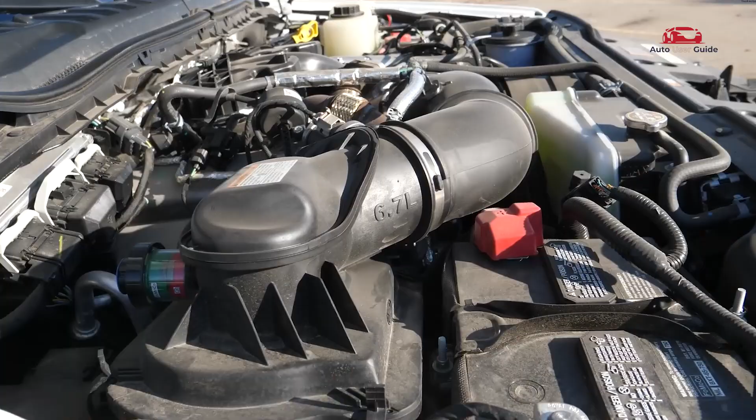Curious about the fuse box location and diagram for the Ford F-350, 2017 to 2019? Wondering where each fuse panel is and what its functions are? This guide answers all your questions, helping you easily locate and understand every fuse.

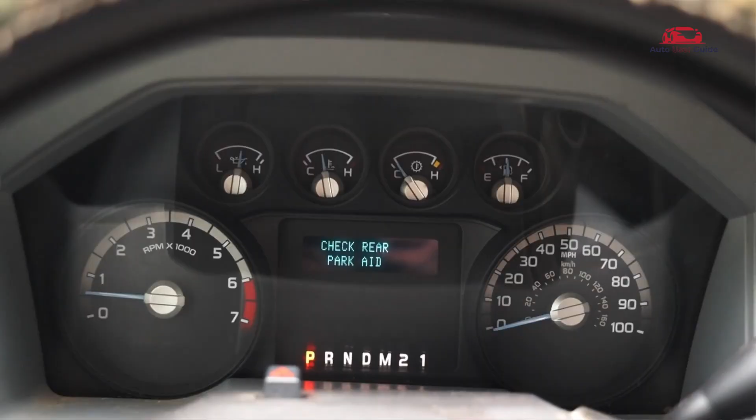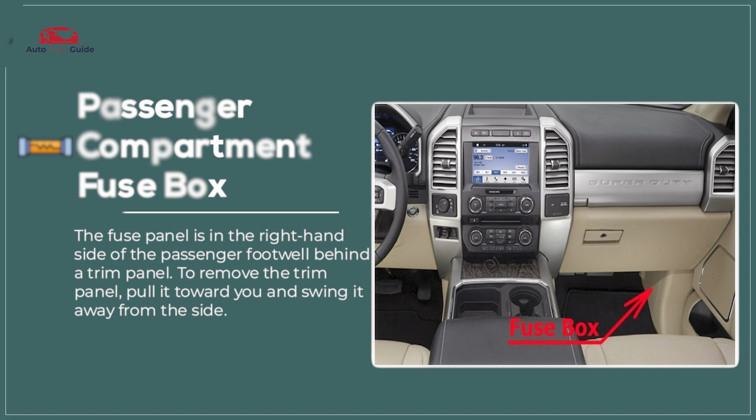Passenger compartment fuse box. The passenger compartment fuse box in the Ford F-350, 2017 to 2019, houses fuses and relays that protect essential interior electrical systems. It manages components like the power windows, audio system, interior lights, and climate controls. Each fuse is labeled for easy identification and service. It plays a key role in vehicle safety and electrical reliability.

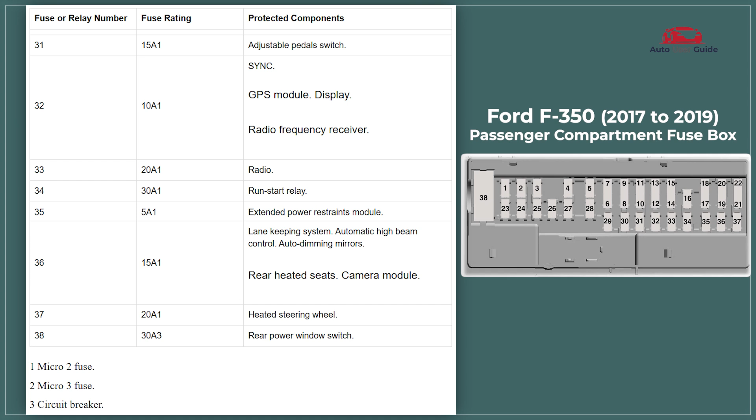Engine compartment fuse box. The engine compartment fuse box in the 2017 Ford F-350 contains high-current fuses and relays that protect vital engine and powertrain systems. It supports components such as the fuel pump, cooling fans, trailer tow module, and electronic power assist steering. This fuse box ensures proper distribution and safeguarding of electrical power under demanding conditions.

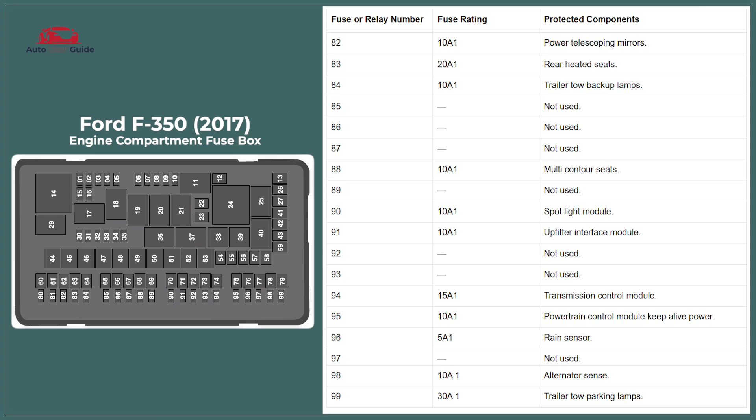The engine compartment fuse box in the 2018 and 2019 Ford F-350 provides protection and power distribution for critical engine and drivetrain components. It controls systems such as the ignition, fuel pump, cooling fans, and trailer tow circuits. Designed for durability, it handles high current loads essential for vehicle performance and safety.

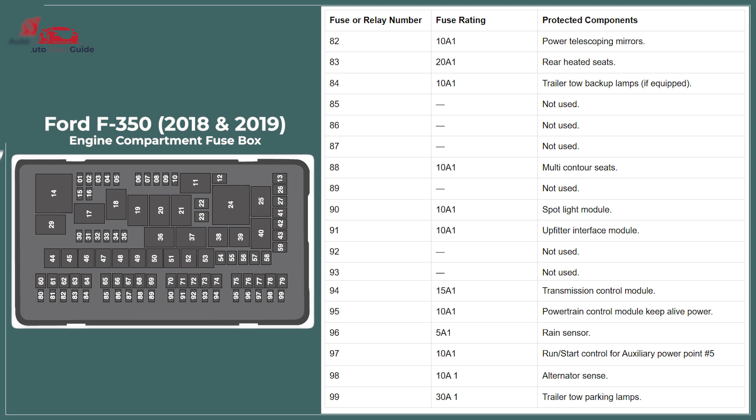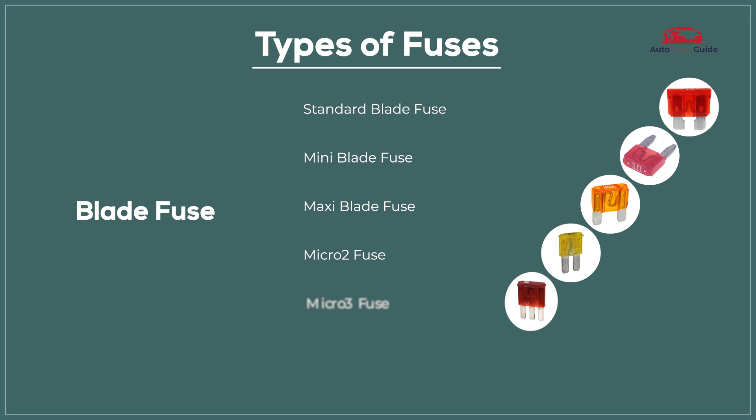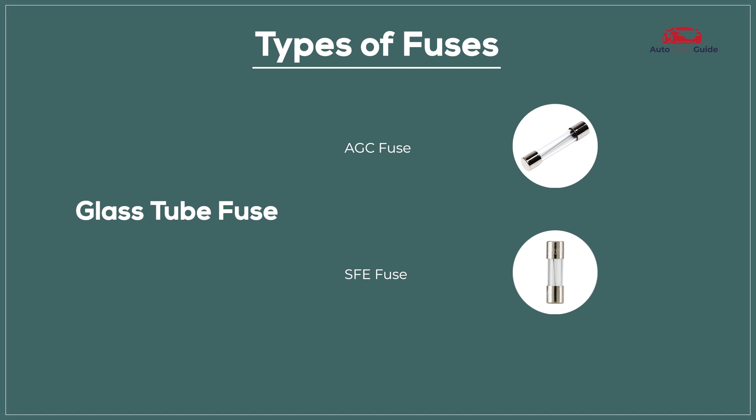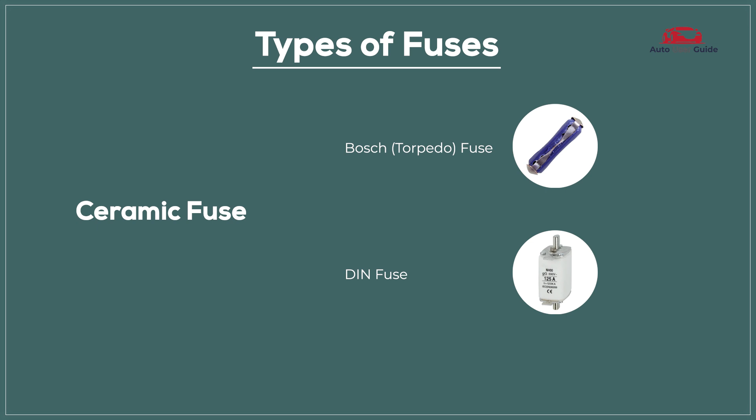Types of fuses: blade fuse, standard blade fuse, mini blade fuse, maxi blade fuse, micro 2 fuse, micro 3 fuse, J-case fuse. Glass tube fuse, AGC fuse, SFE fuse. Ceramic fuse, Bosch fuse, DIN fuse. PAL fuse, low profile PAL fuse, standard PAL fuse. Link fuse, mega fuse, high amperage link fuse.

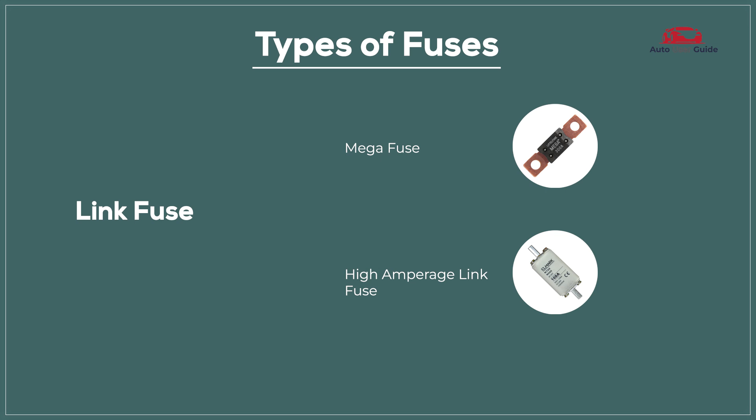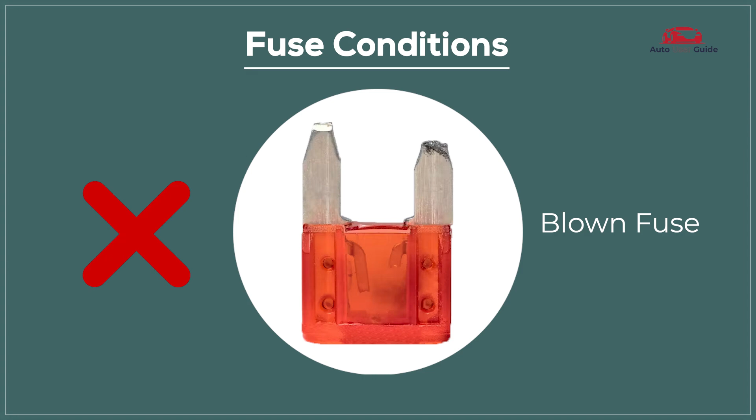Fuse conditions. Blown fuse: a blown fuse means it's no longer functioning and needs replacement, while a perfect fuse is in good working condition and performing as expected.

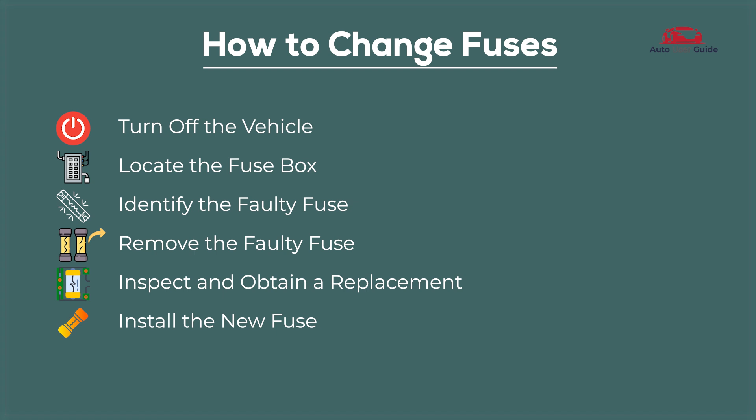How to change fuses: turn off the vehicle, locate the fuse box, identify the faulty fuse, remove the faulty fuse, inspect and obtain a replacement, install the new fuse, test the replacement.